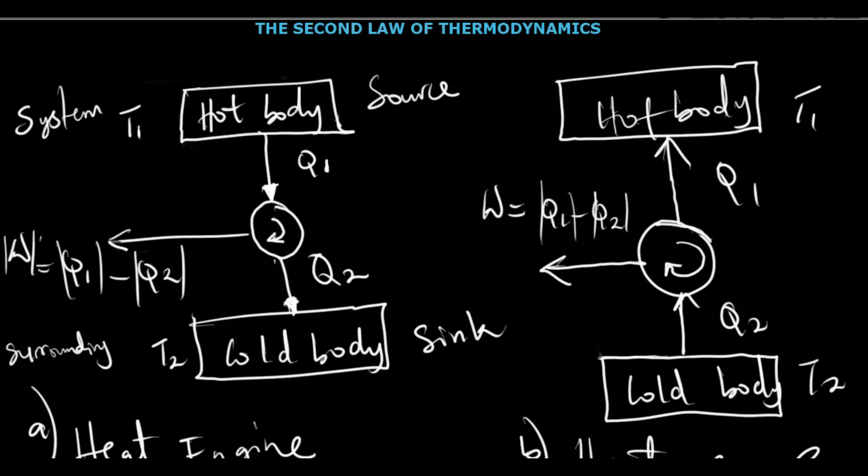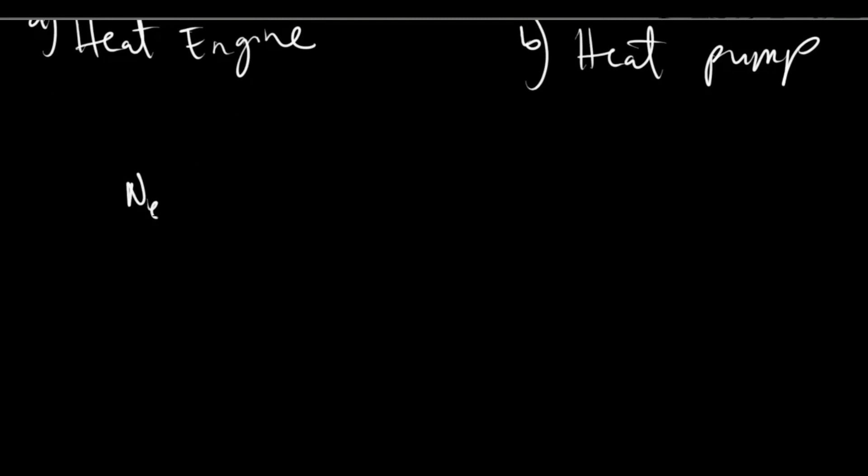Now, hence we can say that network done, where we are using the magnitude sign, means that energy can come from the source and also from the sink, vice versa, so it can be a negative value. So the modulus of heat supplied or heat loss should be a positive value.

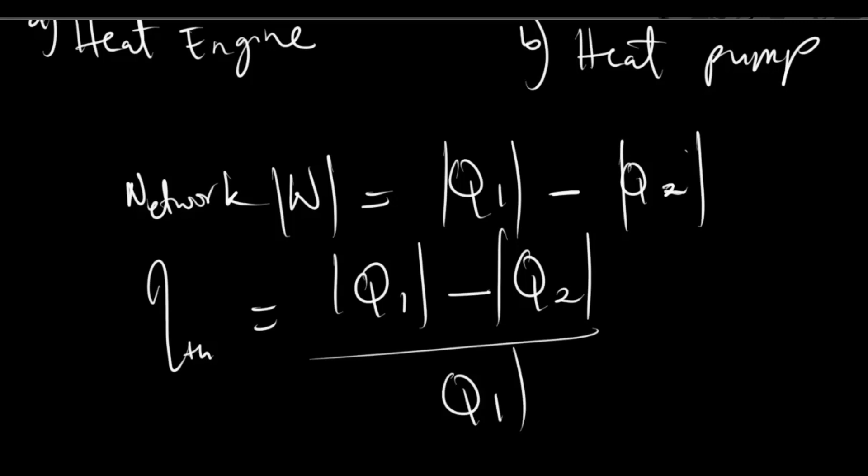So thermal efficiency is given by network, which is Q1 minus Q2 over Q1, where Q1 is the heat supplied, and Q2 is the heat rejected.

That is for the heat engine, because it's vice versa, or the other way around for the heat pump. Okay, so for a heat engine...

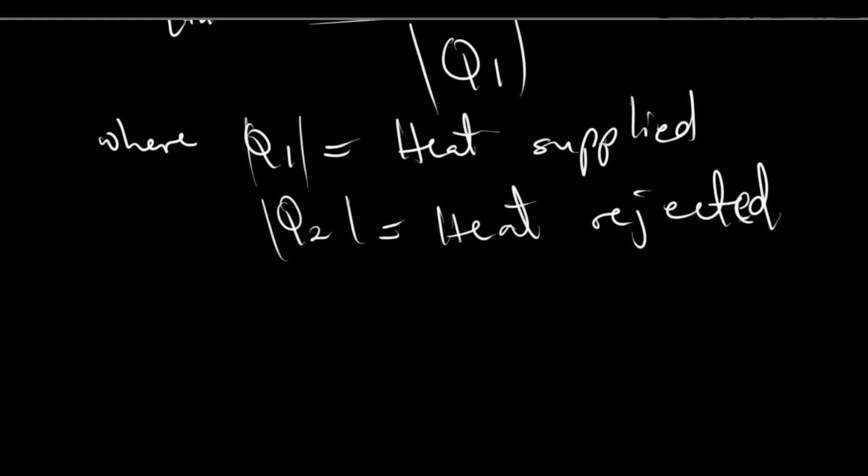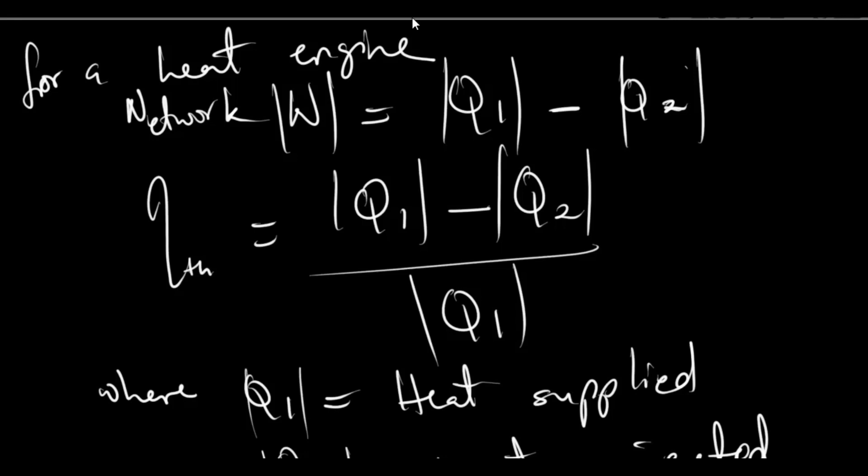So a heat pump now is the inverse of a heat engine. How do I mean by this? Now...

Energy or heat is supplied to the heat pump from a cold body. So heat is extracted from the cold body to the heat pump, and then it goes down to the hot body. So here still remains the source of heat, here remains the sink.

Heat is forcefully taken from the cold body, which moves the heat pump and down to the hot body, but this is practically impossible, as the case may be.

But a heat pump reacts in diverse ways, so it's practically possible to have it this way, since heat can be channeled back to the hot body. So the heat that is channeled back to the cold body is extracted back again to the hot body, so that keeps it in a circle. That's why you call it a cycle.

It's a cycle, that's why it's a cycle. And just like I said, it's practically impossible to construct a system that will just extract the heat, operate in a cycle, and do exactly an equivalent work on the surrounding without losing some heat. It's not possible. It has to lose some heat.

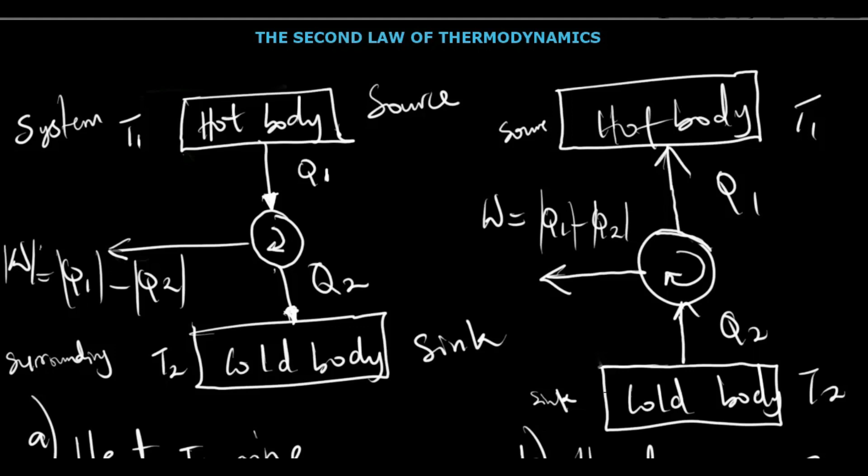So having said this, let's take a good look at an example that will help us understand this perfectly. Example 1: A system undergoes a power cycle,

receiving 1000 kilojoules by heat transfer from hot combustion gases at a temperature of 500 Kelvin, discharging 600 kilojoules by heat transfer to the atmosphere at 300 Kelvin. Taking the combustion gas and atmosphere as hot and cold bodies respectively, determine for the cycle the network developed and the cycle thermal efficiency.

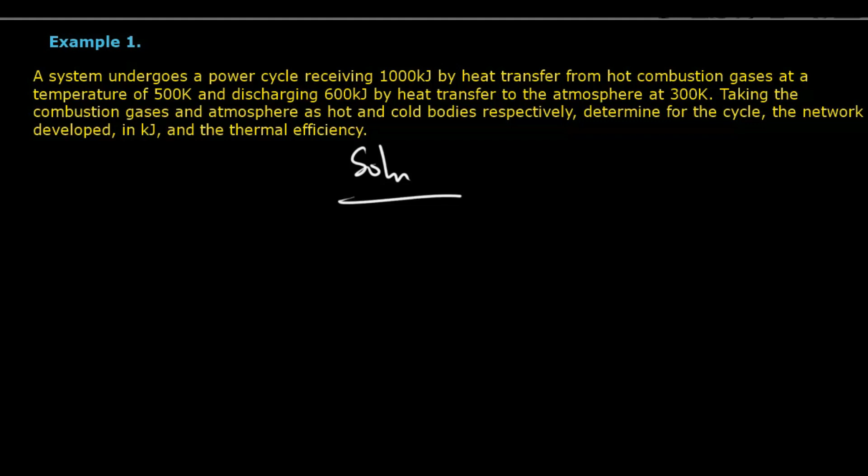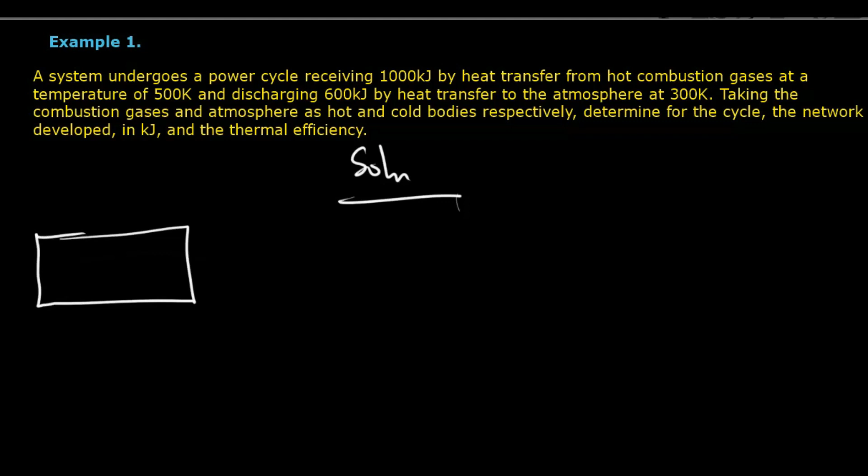So first of all, you start by writing the solution. After that, you draw out, you plot the diagram to illustrate what we mean by that. So I will have this over here, I will have this over here, and I also have this over here.

Right, okay. The work of art. No, I should learn how to draw sometimes. Helps.

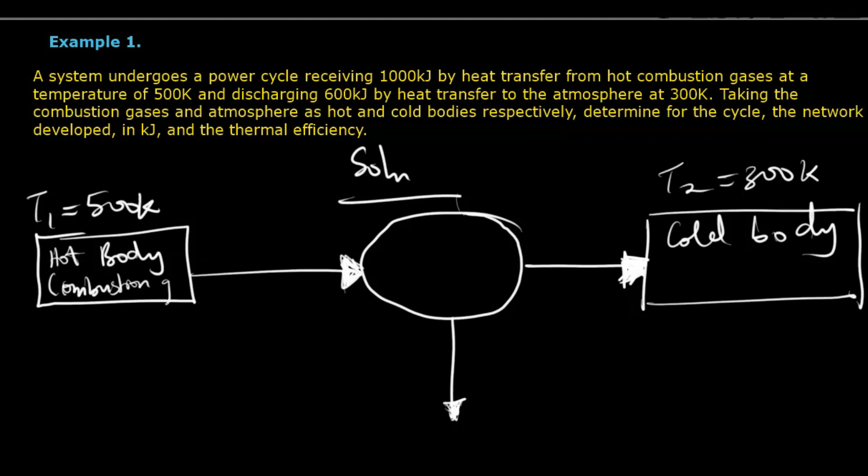Yes, so now they said, remember, here is our hot body, and this is our cold body at temperature 1, 500 Kelvin, temperature 2, 300 Kelvin. Now the hot body is the combustion gases, okay, this is our heat engine.

A power cycle, a heat engine, is an example of a power cycle. So heat engine Q1, Q2 respectively, the atmosphere, which is our cold body. Okay, now finally the network, which is Q1 minus Q2,

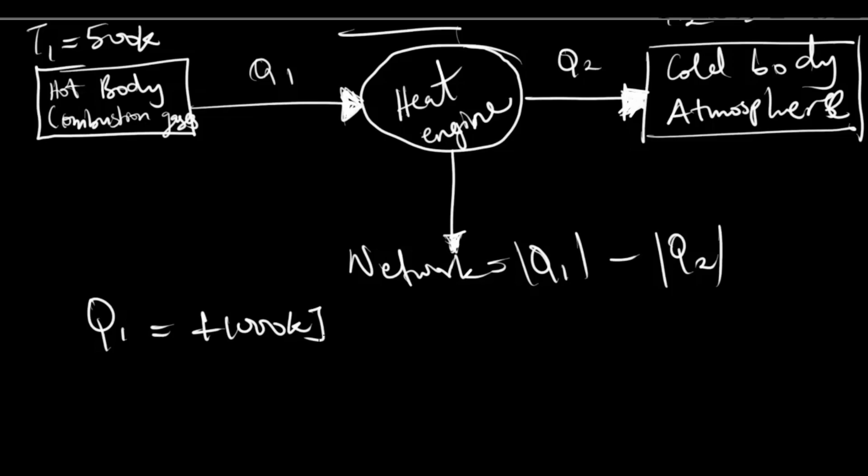as it implies. So they said the power cycle receives 1000 kilojoules. What does that mean? It means Q1 supplied to the heat engine is plus 1000 kilojoules. Now discharging 600 means it rejects, that is Q2 minus 600 kilojoules.

Now the network obviously will be, sorry for the big handwriting, the network, which is Q1 minus Q2, will be, the magnitude of Q2 is 600, so network will be 1000 minus 600. So we have that network is 400 kilojoules.

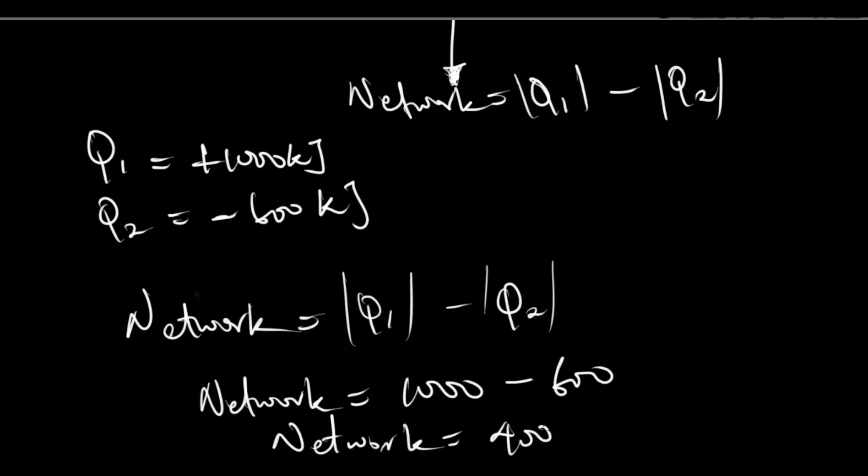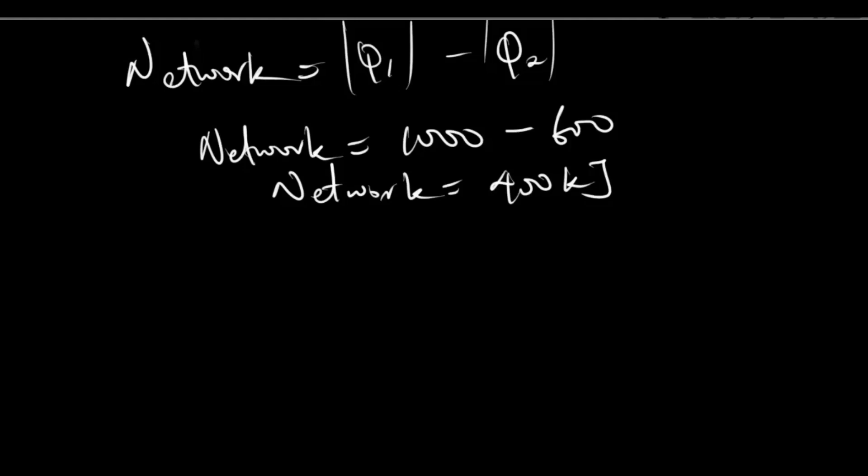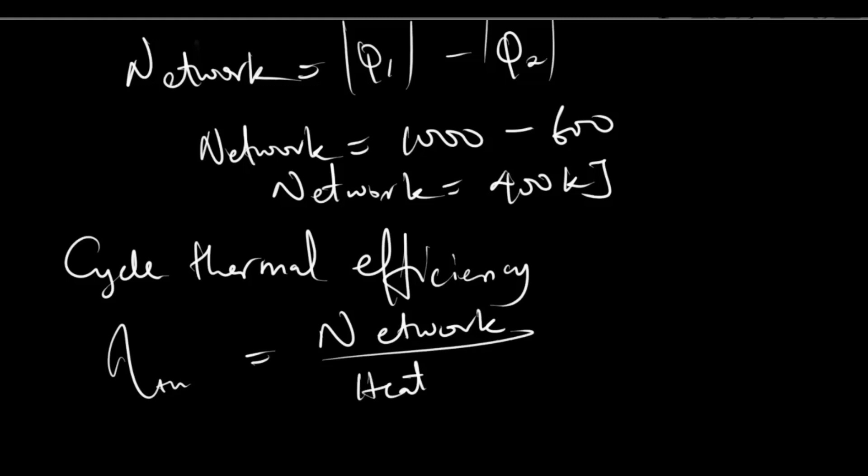Okay, now the cycle thermal efficiency is given by network all over heat supplied. You know what our network is, we know what our heat supply is.

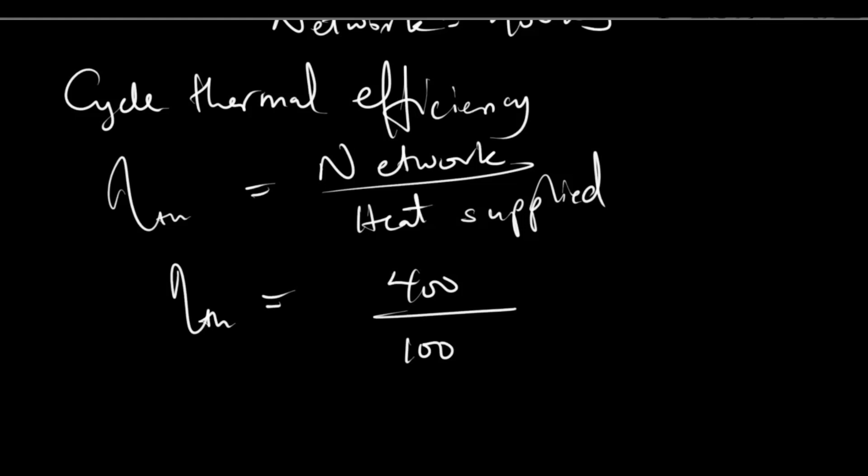So inputting the values, we have this times 100. So efficiency is what? 40%. Okay, similarly, we can also

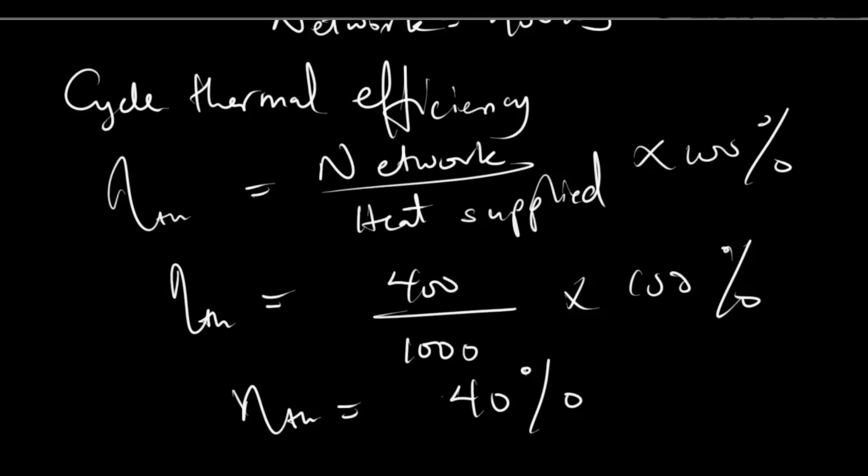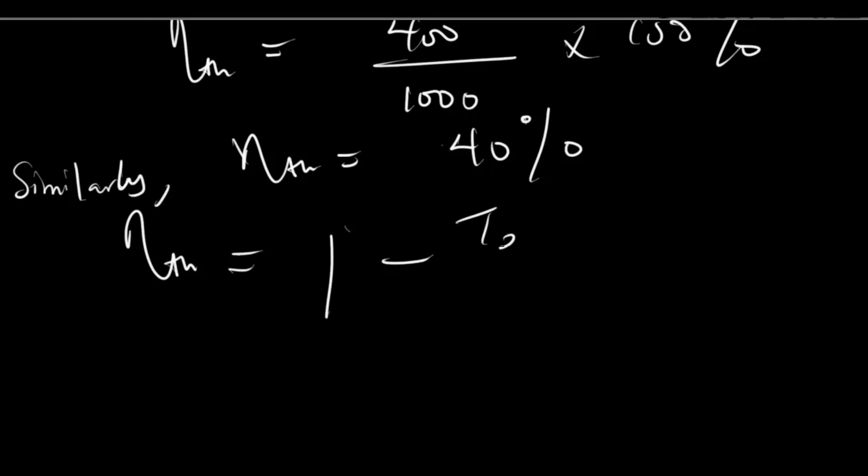say that we can also use the temperatures. Remember, we can also use the temperatures, and similarly this can be 1 minus T2 over T1 times 100%.

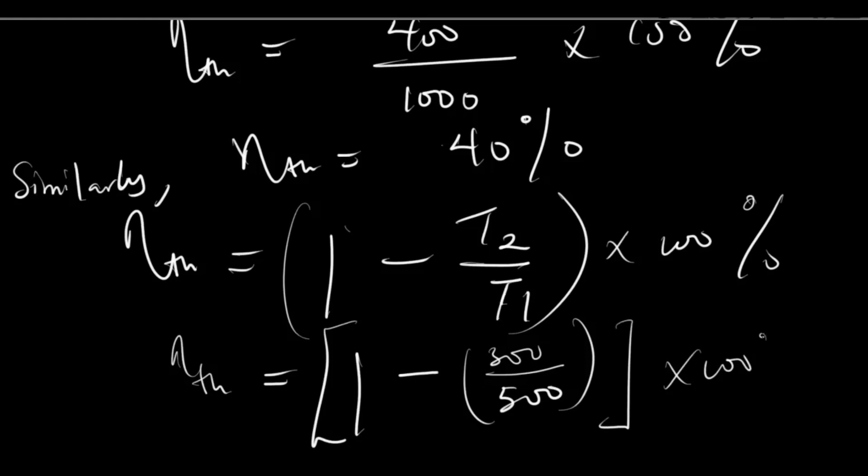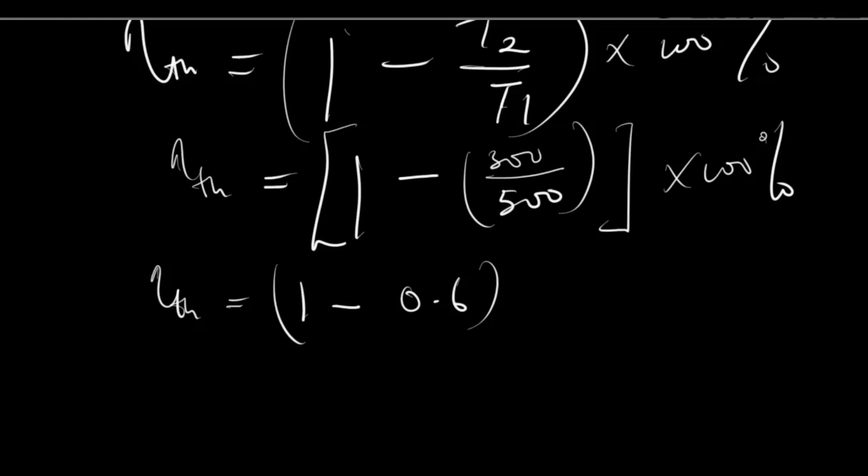So 1 minus T2 is what? 300. T1 is 500. Times 100%. So we have that 1 minus 0.6 times 100%. So this is at 0.4 times 100%.

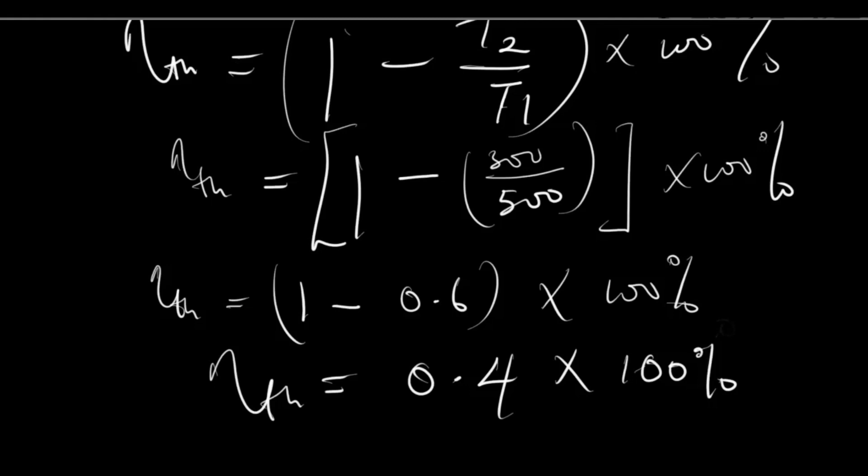Sorry, this is 100. So we clean it over here, percent. Okay, so that will give us 40%, which is the same as before, the same as the previous answer.

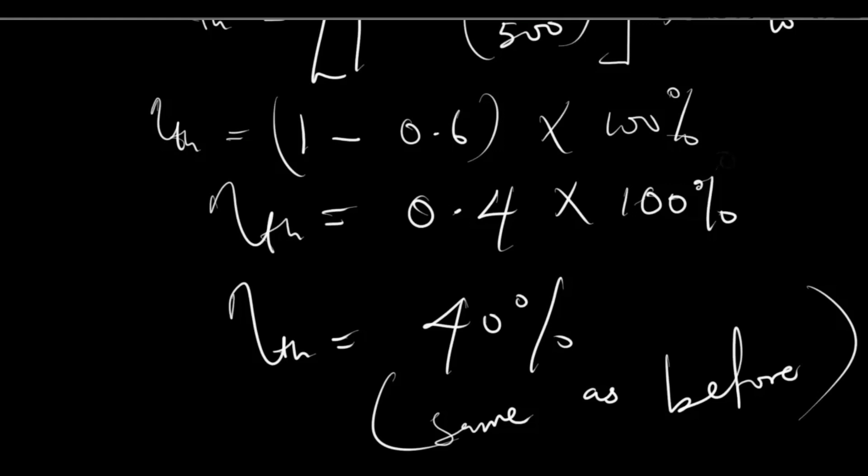So this is an example to help illustrate what we actually meant by the diagram we drew in the first page here. Okay, we have gotten the thermal efficiency just as stated in the question, our network.